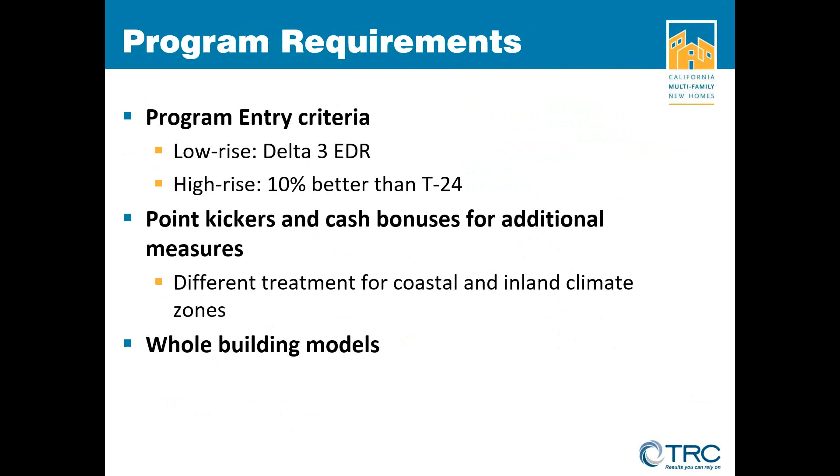We have point kickers and cash bonuses for additional measures, and these are treated differently under the coastal and the inland climate zones. We will be going over all these kickers in greater detail in the subsequent slides. We are now accepting whole building models, which includes all space types, basically to reduce the burden on the energy consultant to revise the models for program purposes. So we are trying to make it easier for projects to come in. We will go over the details of it in the next few slides. Again, the 2017 program is applicable to all 2016 code permitting projects that were permitted starting January 1st, 2017.

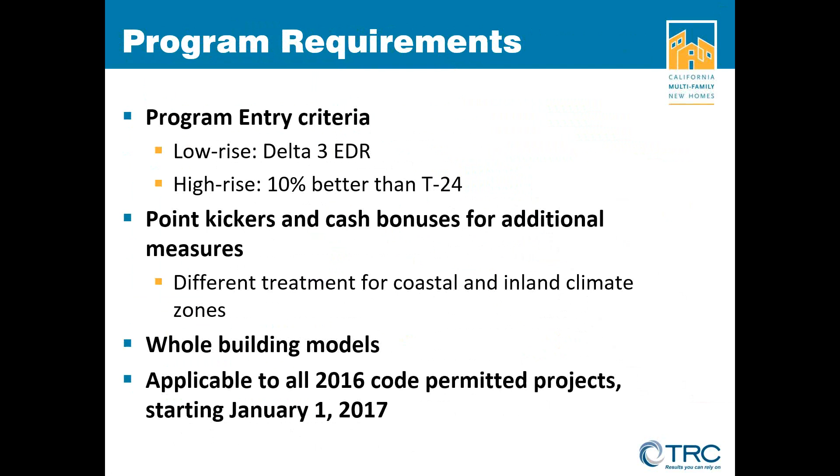These point kickers can help bring the program into the projects as well.

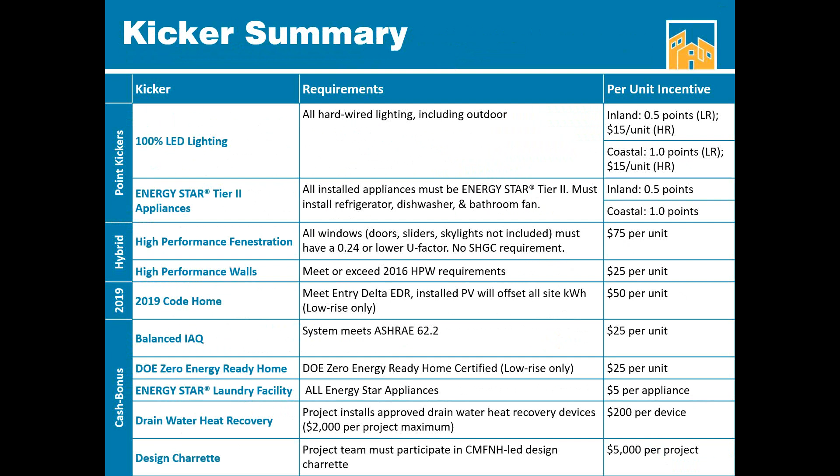And finally, the design charrette, which we will be discussing in greater detail towards the end of the presentation. The project must participate in a CMFNH-led design charrette, and the incentive amount for this one is $5,000 per project.

So we will now jump directly into the modeling issues and guidelines, which is our second topic on our agenda. We will be discussing common areas and non-res spaces, going over how to identify these spaces and their specific modeling guidelines, using some examples.

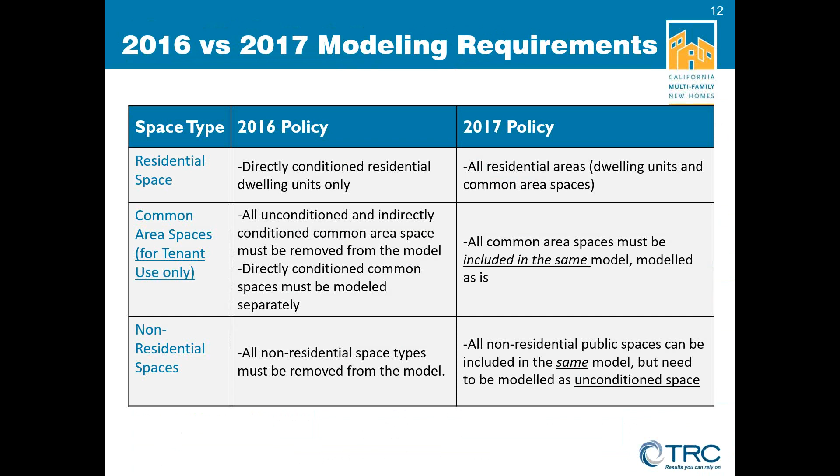Can these be modeled in the model for the program? Yes, and they should be included in the same model as the dwelling units and modeled as is.

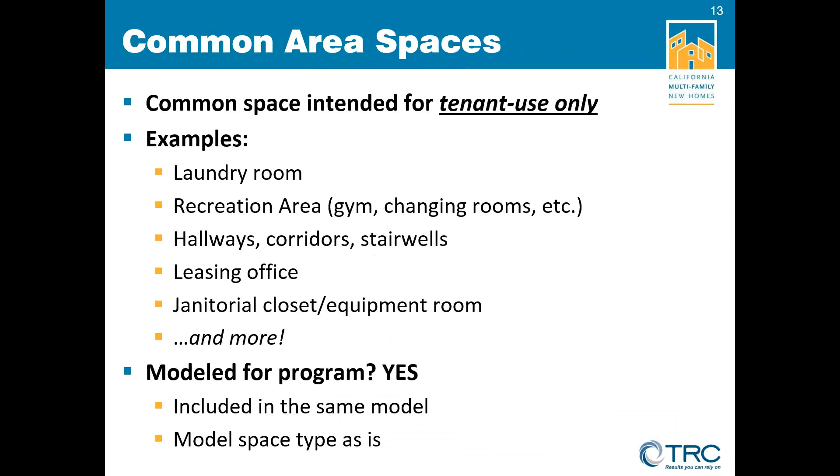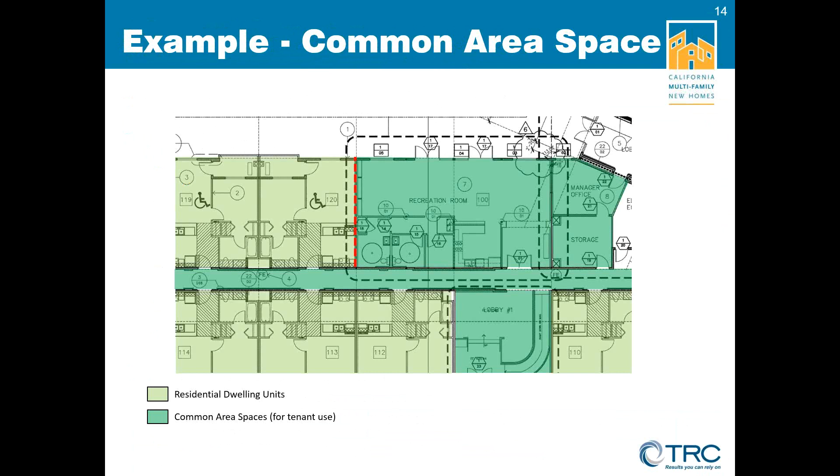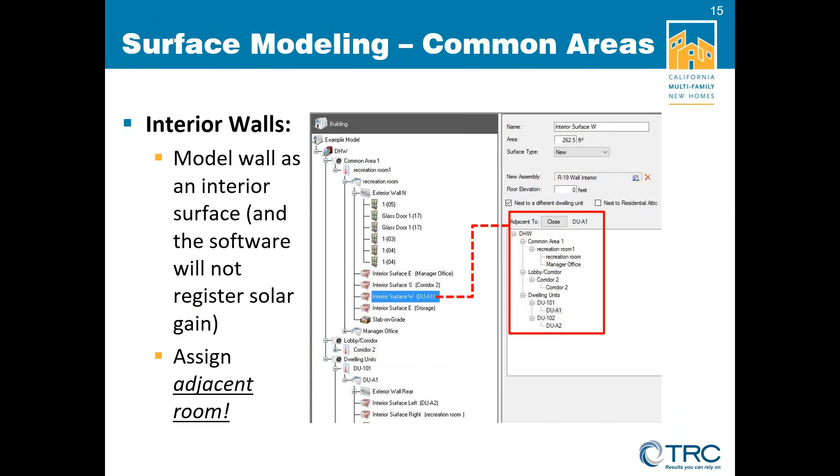Parul, we have a question. Why would we model non-res areas as unconditioned? I think they may think it's worse than removing it to model it as unconditioned.

The purpose for assigning an unconditioned zone to non-res spaces is to not include it in the compliance. It should not affect any HVAC, DHW, or any other use, and we only want the compliance to be for the residential areas, which is why we ask them to set it to unconditioned. Earlier we used to ask them to remove it, but that's an additional hassle, per feedback we received. So it's just to simplify the process, but if you want to remove it, that is also acceptable for the program.

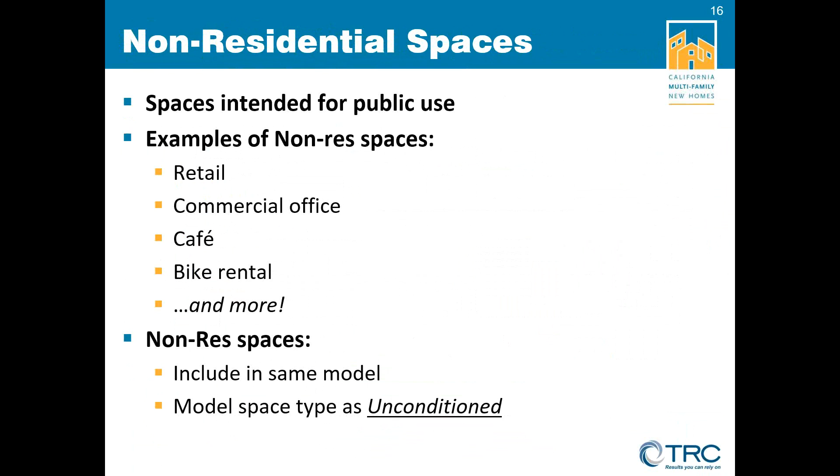Moving on, another example for the non-res spaces. This slide shows an example of a multi-use building which includes residential dwelling units, retail spaces, and unconditioned spaces.

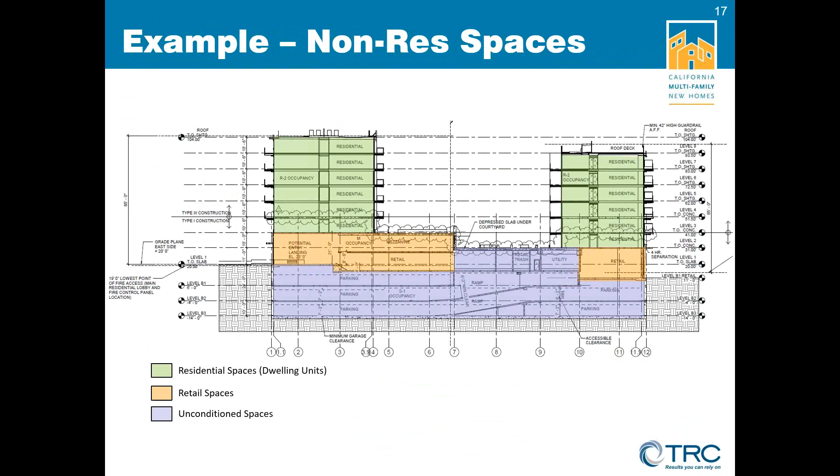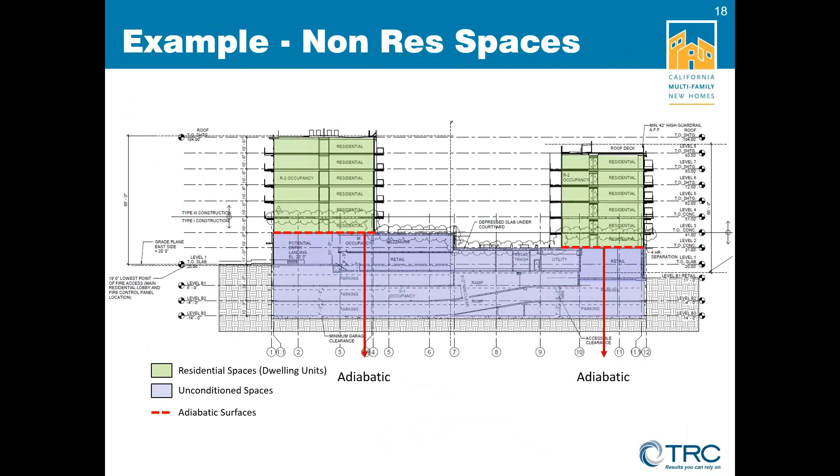Under the 2017 program, the whole building model can be submitted, but it's okay to remove the unconditioned spaces. The retail spaces, if they want to be included in the model, have to be set to unconditioned, as can be seen here. In such cases, the shared surfaces between the conditioned residential spaces and the now-unconditioned retail space need to be assigned as adiabatic or party surfaces, which allow no heat exchange. The modeling of this surface, denoted by the dotted red lines, is discussed in the next slide.

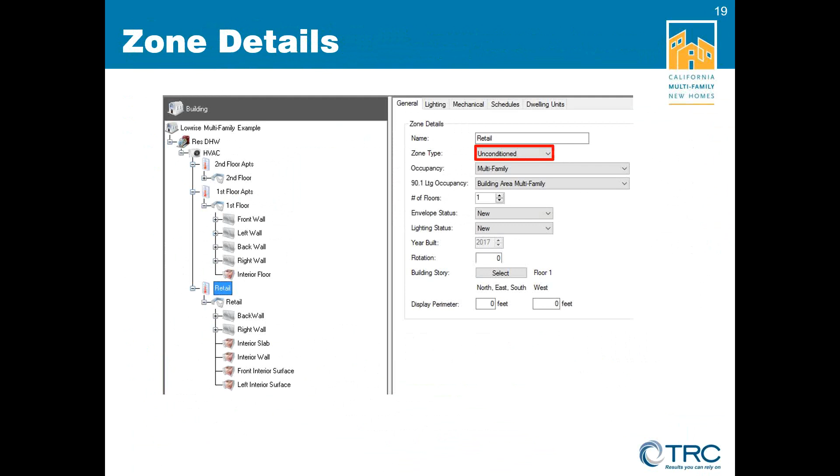For all non-res spaces, it's important that the zone type be set to unconditioned if they want to be kept in the whole building model, but they can be removed if required. We need to choose the internal surface option for the common floor and not set any adjacent room to it, so the surface can be treated as adiabatic, allowing no heat exchange, because we don't want to account for any losses from there.

Before we continue, do we have any other questions, Allison, at this point? No, not at this time. Okay.

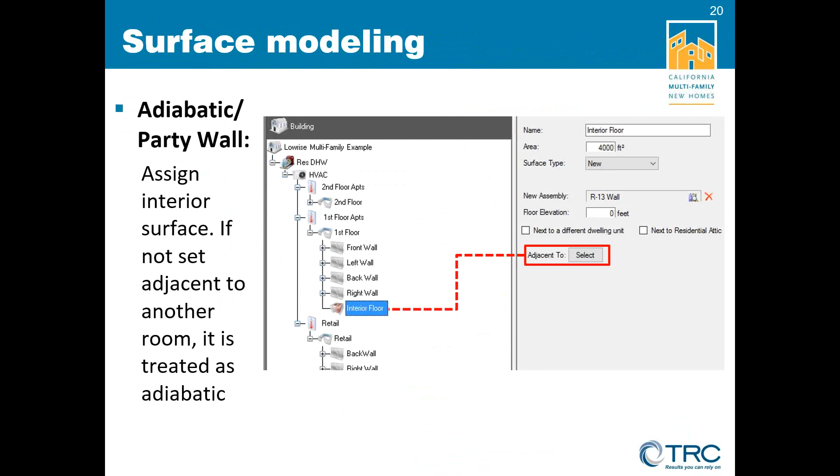So here's a question. What about mechanical systems that serve both common and non-res spaces?

Model it. You can model it.

So this is Ritesh Nair. I'm the plan review manager for TRC.

For mechanical systems serving both space types, yes, you can model them. And if you have the same system, you can put it together under the same system type in the energy model. Regarding the surface shared between the two space types, be particular in making them interior surfaces, so that you account for the heat loss or heat gain between the two surfaces. But if that doesn't answer your question, you can write it in more detail, and I'll be happy to answer that.

All right, great. There's no more questions at this time, Parul. Great, thanks Allison, moving on. Sorry, we just got one.

Will cash incentive kickers be applicable to non-res areas? For instance, 100% LED lighting to get the incentive. Does a non-res space also need to be LED? No, it's only for tenant use. So any dwelling unit, any common area intended for tenant use, but none of the non-residential spaces like retail, bike rentals, leased offices, common gymnasium. If you put LED in that, we will not be incentivizing that. The reason for that is most of the IOUs, but in this case PG&E has their commercial programs which do offer LED lights incentive, maybe midstream, upstream, or customized incentive. And we don't want the customer in a situation where they double dip in the savings and get penalized later on.

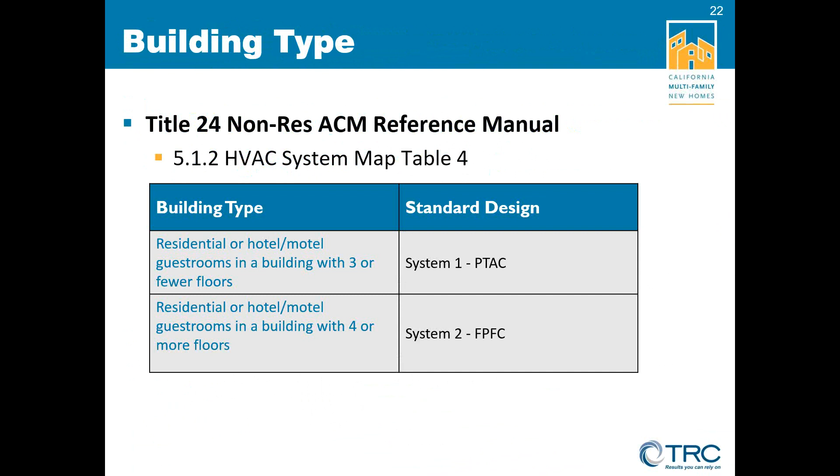So, the standard design, the equipment in the standard design that we see for low-rise multifamily buildings is a PTAC system, a packaged terminal air conditioner that is used in the prescriptive standard design model, and that is what your model is being compared against. For any building which is 4 or more floors, which is a high-rise multifamily building, a 4-pipe fan coil unit is the standard system.

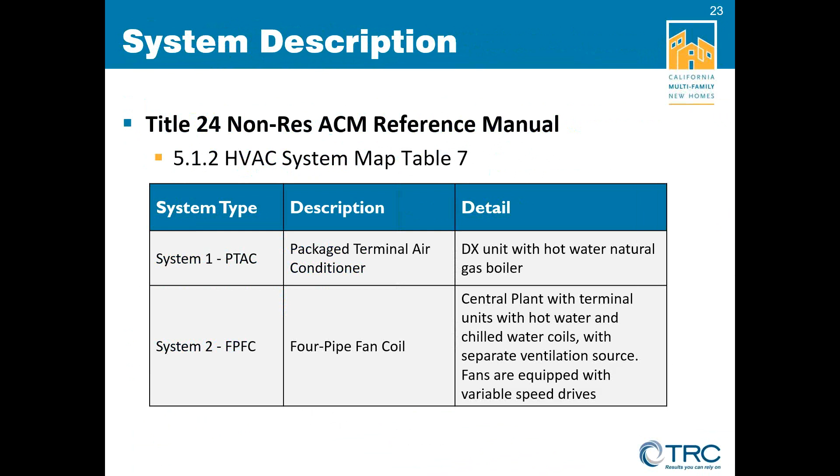So a little more detail on what these systems are. The packaged terminal air conditioner is a DX unit with hot water natural gas boiler, and a 4-pipe fan coil unit is a central plant with terminal units with hot water and chilled water coils with separate ventilation source. In this case, fans are equipped with variable speed drives also.

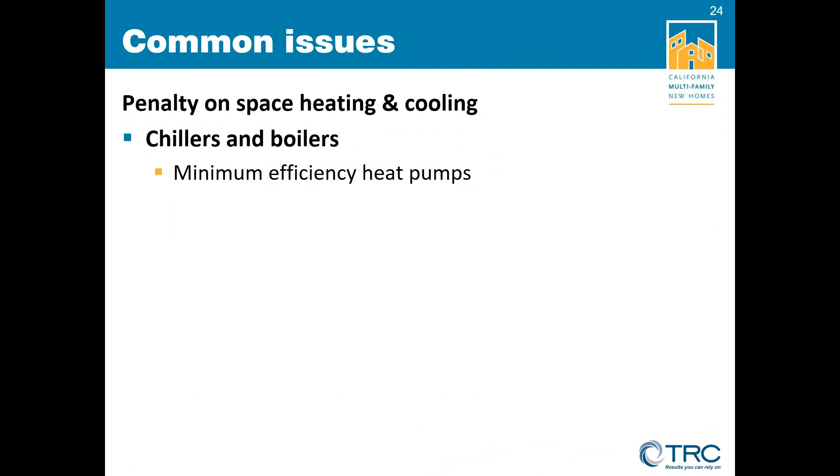So very few projects that are coming in are installing chillers and boilers. Majority of the projects coming in this year are installing heat pumps, which are of minimum efficiency and are unable to beat the efficiencies of the standard systems.

Also, a lot of the systems we are seeing are ductless heat pumps, which include ductless mini-split, multi-split, and VRF systems that are not approved, that do not have an approved compliance option yet. Therefore, these systems are defaulted to a minimum efficiency split system, which is equivalent to the design system with default duct conditions as well, giving no compliance benefits, which is why we are seeing that the projects are either not qualifying or do not have a very high compliance. We are seeing a heavy penalty on space heating and cooling.

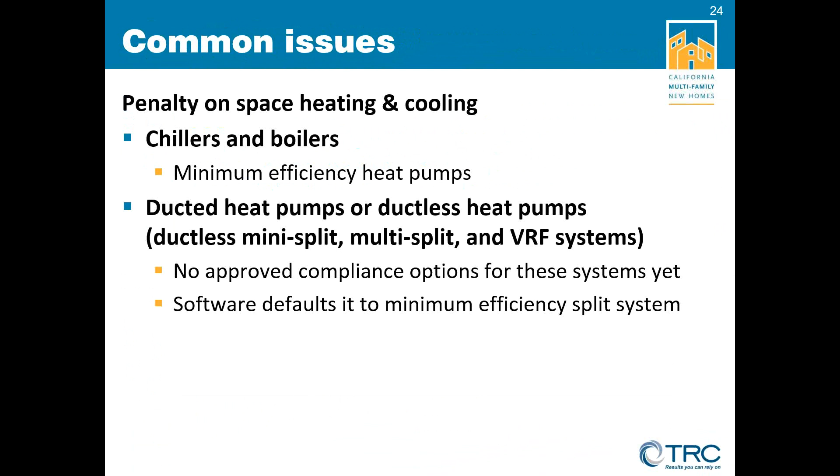So how do we overcome this issue? How to qualify for the program? Look at alternate ways to increase efficiency of the building. If you want to install heat pumps, look for more efficient heat pumps, but this is only applicable for ducted heat pumps because the ductless are, as I mentioned, defaulted to the minimum efficiencies.

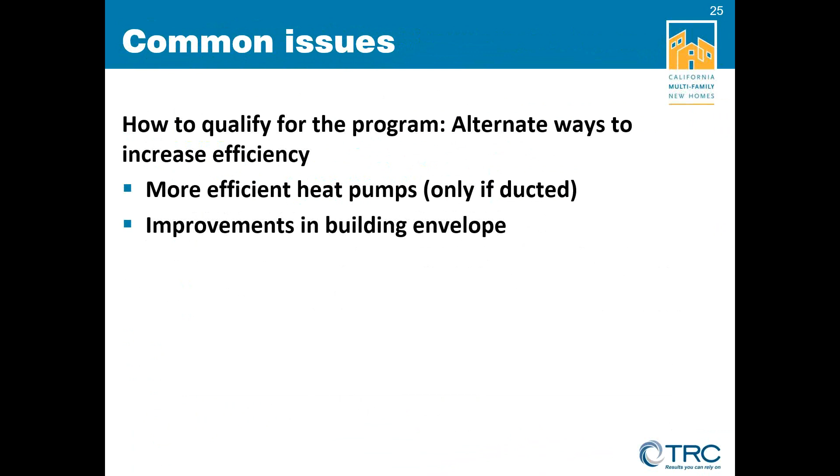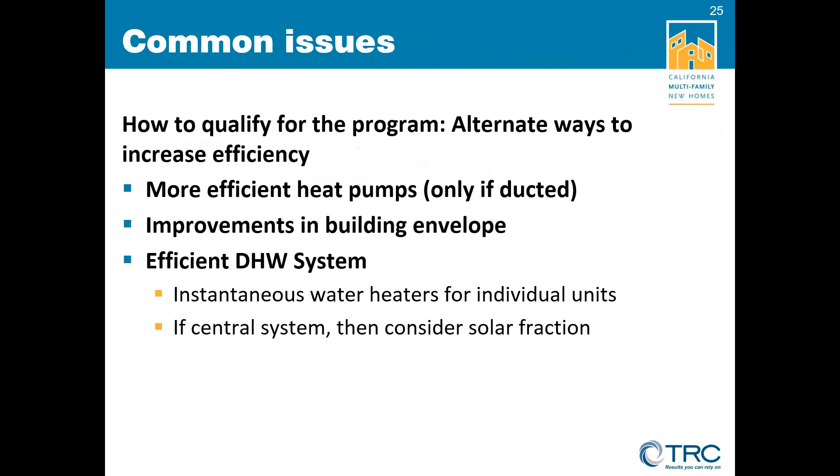Look for improvements in building envelope. These may include higher R-value for wall insulation, more efficient windows, higher SHGC for colder climate zones for the windows, etc. You can also look at efficient water heating systems for buildings that have individual DHW systems for units. Look at instantaneous water heaters for individual units, and if there's a central system serving multiple dwelling units, then solar fraction should be looked into. Consider renewables for your project, which also takes us to our next topic for today, which is DHW solar fraction.

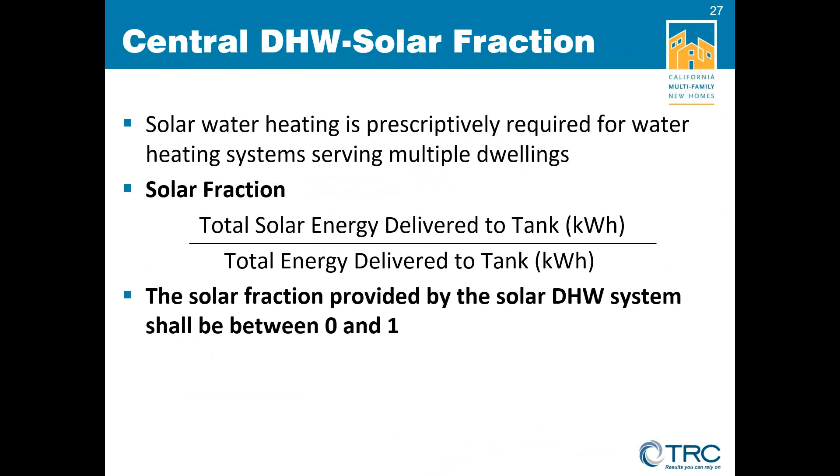The prescriptive requirement for such central systems, as given in Title 24 Residential Compliance Manual, is for climate zones 1 to 9, there is a prescriptive requirement of 0.2 solar fraction, while for climate zones 10 to 16, a prescriptive solar fraction of 0.35 is prescribed in the code.

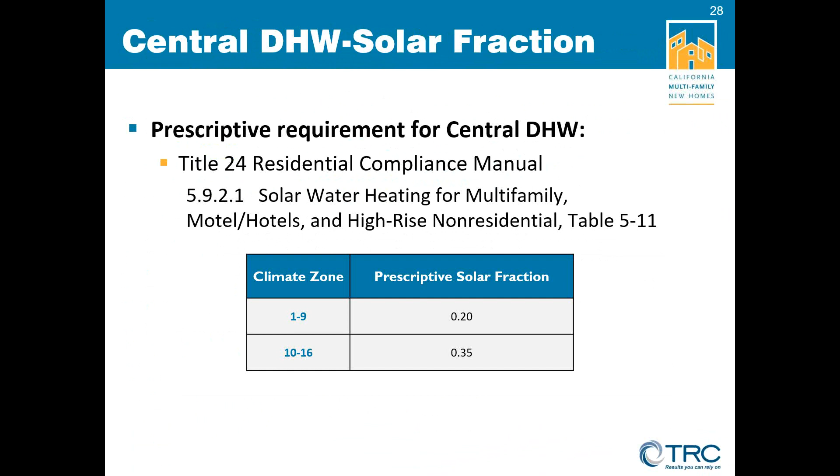We have been seeing the following two scenarios. For projects that come in through the CMFNH program, there are two possibilities: either you only come through CMFNH, or apply for both CMFNH and CSI programs. I will go over an example to talk about solar fraction and how it needs to be modeled.

Say, for example, if a project is in climate zone 5 and has a 70% solar fraction that has been designed for that project. If the project is coming through CMFNH only, then the solar fraction can be modeled as is, which is at 70%, which was what was designed for this particular project.

In that case, we also require a document called the F chart, which will provide the specifications for this solar system. In another scenario where a project is applying for both CMFNH and CSI programs, for CMFNH we can only accept the model to have just the prescriptive solar fraction value, which is 20% for climate zone 5.

We cannot allow the project to be modeled at 70%, because the project is already applying for CSI, and we use 20% because we do not want the solar system to also face any penalties, since 20% is the prescriptive requirement.

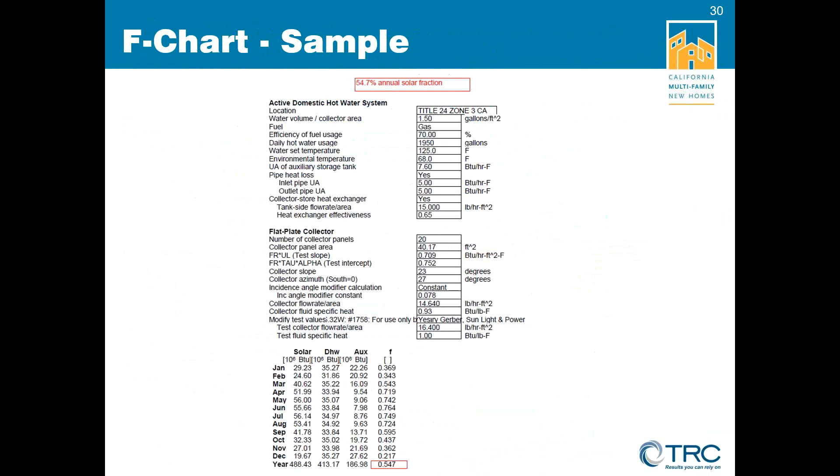The bonus incentive is $5,000 per project, where the CMFNH staff works with the project team to discuss their goals and help achieve deeper savings. Design assistance can start right at the schematic design stage, so it's always beneficial if it's requested at the start of the project. We're able to influence the project for deeper savings and also get better incentives for the CMFNH program.

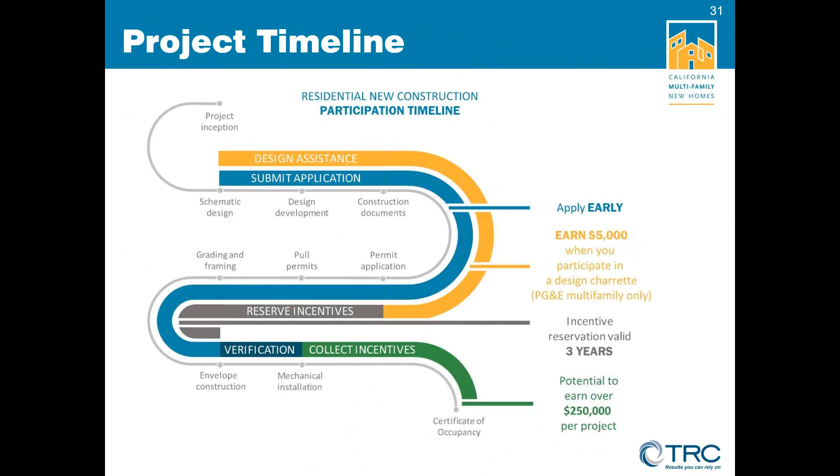So when you're looking at submitting the application, right at that point, you can ask for this option as well. We'll discuss in detail how Design Charrette works and what it entails overall.

This Design Charrette may occur in person or via conference calls, and the idea is to discuss project goals and help achieve deeper savings. The process brings together the project team members, including the developer, the architect, the mechanical engineer, energy consultant, general contractor, and the HERS rater.

The team may also include representatives from other programs such as GreenPoint Rated or NSHP. It's also important to note that the $5,000 incentive shall only be awarded once the project qualifies for the program, but we're happy to work with you to assist with any project needs. So definitely reach out to us if you want to participate in the Design Charrette process.

Over to you, Allison. Okay, so we do have another question about the Design Charrettes: do we need to have the final energy models ready for the project if we want to participate?